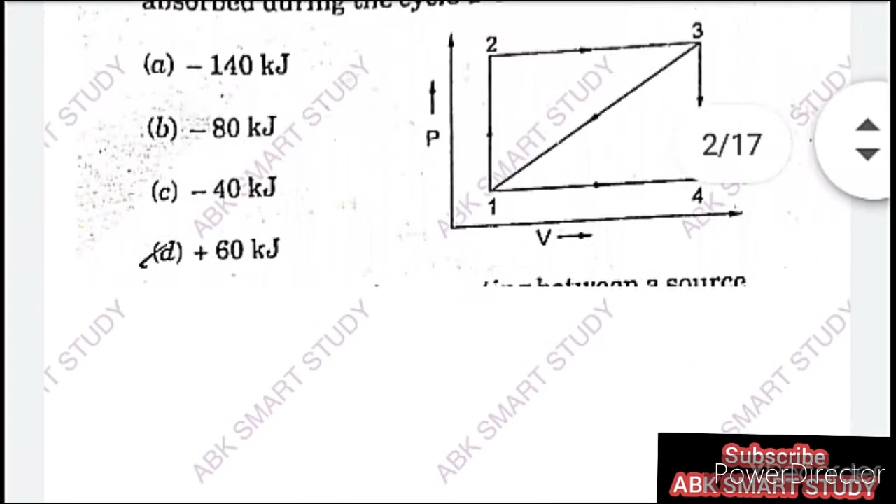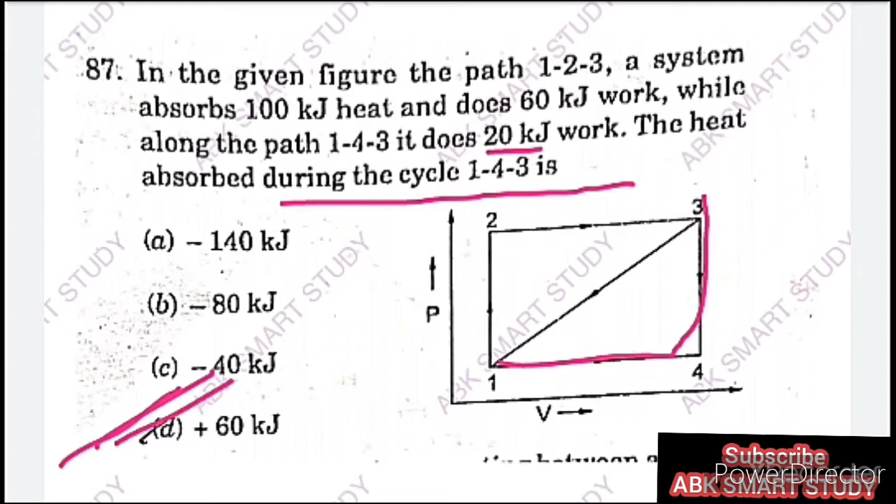So while along path 143 it does 20 kJ of work, the heat absorbed during 143 is 40 plus 20, which is equal to 60. That matches option 4, so option D is the correct answer for heat absorbed during cycle 143.

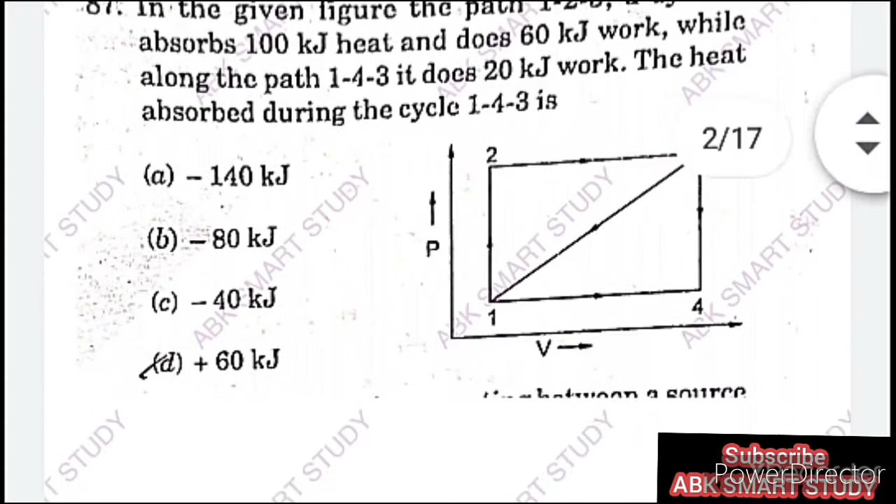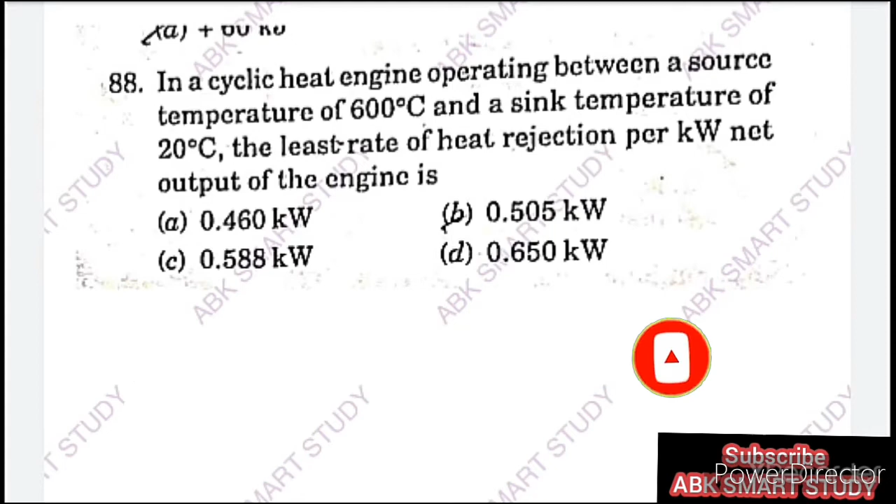Next question: In a cyclic heat engine operating between a source temperature of 600 degrees Celsius and sink temperature of 20 degrees Celsius, the least rate of heat rejection per kilowatt net output of the engine is. We know maximum efficiency is equal to T1 minus T2 upon T1. Here T1 is 600 plus 273, which is 873, and T2 is 20 plus 273, which is 293 degrees Kelvin.

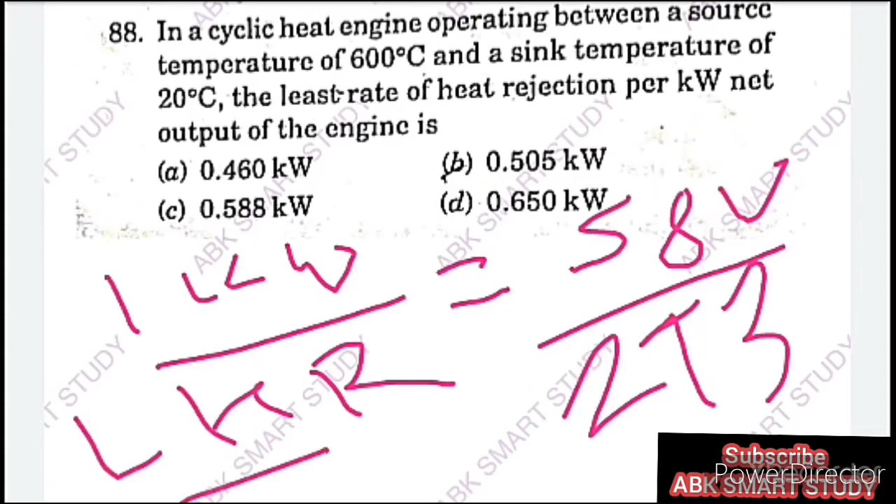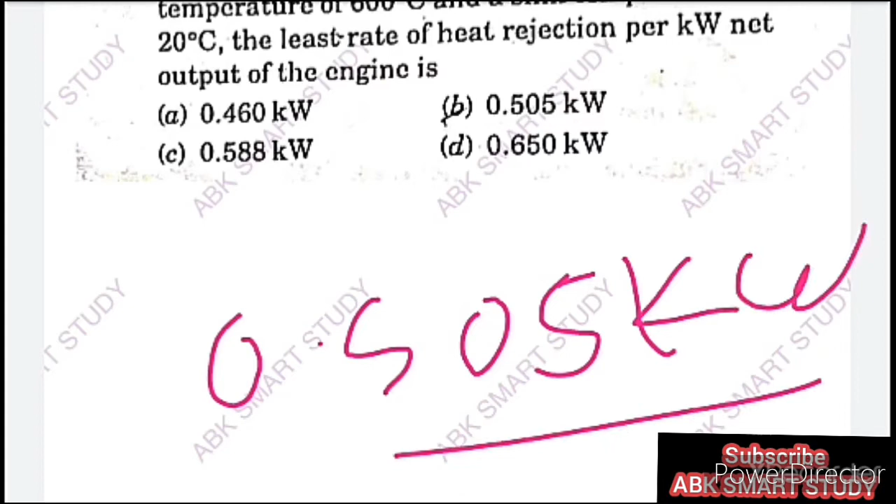By calculating that, we get least heat rejection equal to 0.505 kilowatt. So for a cyclic heat engine operating between source temperature 600 degrees Celsius and sink temperature 20 degrees Celsius, the least rate of heat rejection per kilowatt net output is 0.505 kilowatt, given in option B. So option B is the correct answer.

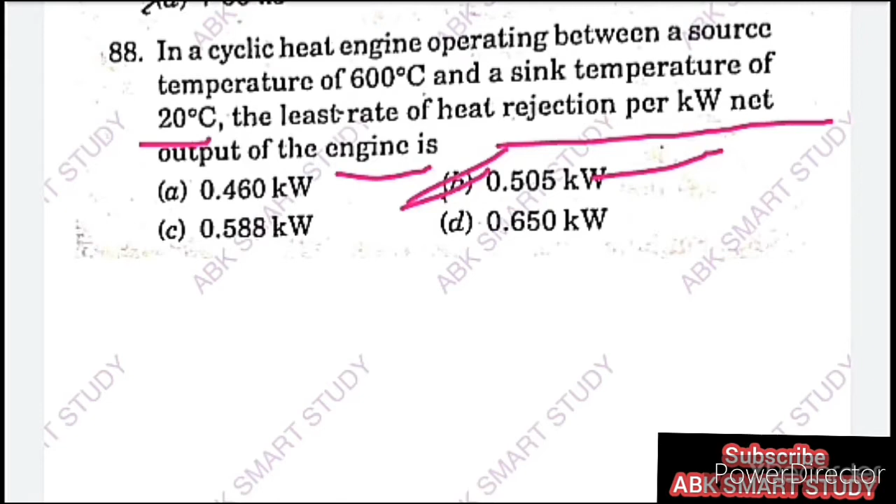Next question: A Carnot engine receiving heat at 400 degree Kelvin, so here T1 is equal to 400, has an efficiency of 25%.

Then the COP of the Carnot refrigerator working between the same temperature limits - here efficiency is given, temperature T1 is given. What is the COP of the Carnot refrigerator working between the same temperature limit? First, we know efficiency is equal to T1 minus T2 upon T1, where T1 is 400 and efficiency is 25%.

By putting that in the equation, we get T2 is equal to 300 degree Kelvin. By using the efficiency equation, we get T2 equal to 300 degree Kelvin. We know COP of Carnot refrigerator is equal to T2 divided by T1 minus T2.

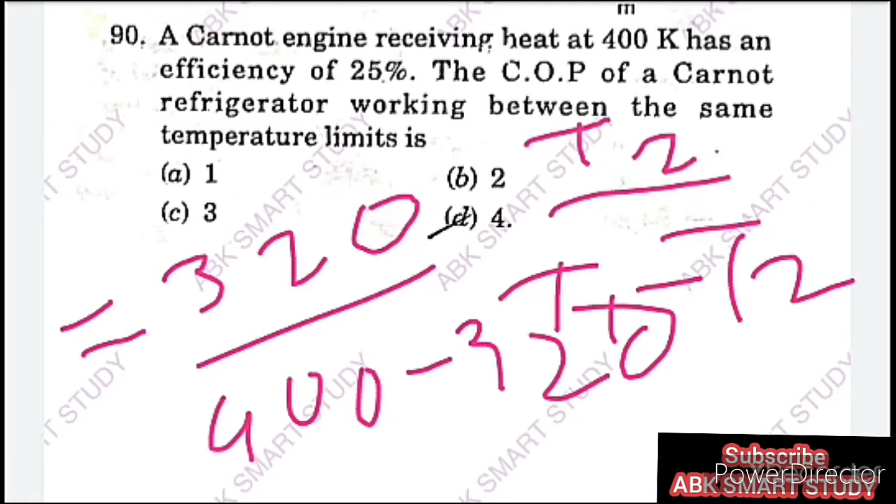Here T2 is known, so COP is equal to 320 divided by 400 minus 320. By solving this, we get COP is equal to 320 divided by 80, which gives COP equal to 4.

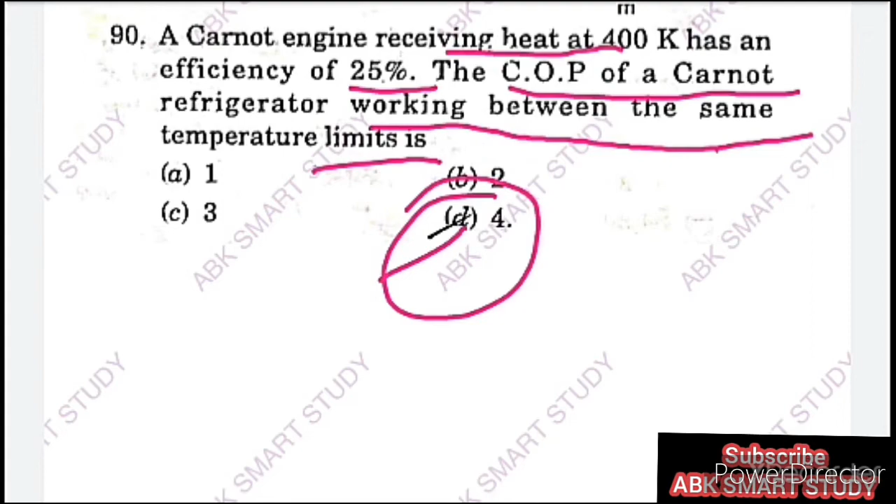So a Carnot heat engine receiving heat at 400 degree Kelvin has an efficiency of 25%. The COP of the Carnot refrigerator working between the same temperature limits is 4, given in option D. So option D is the correct answer. Next question.

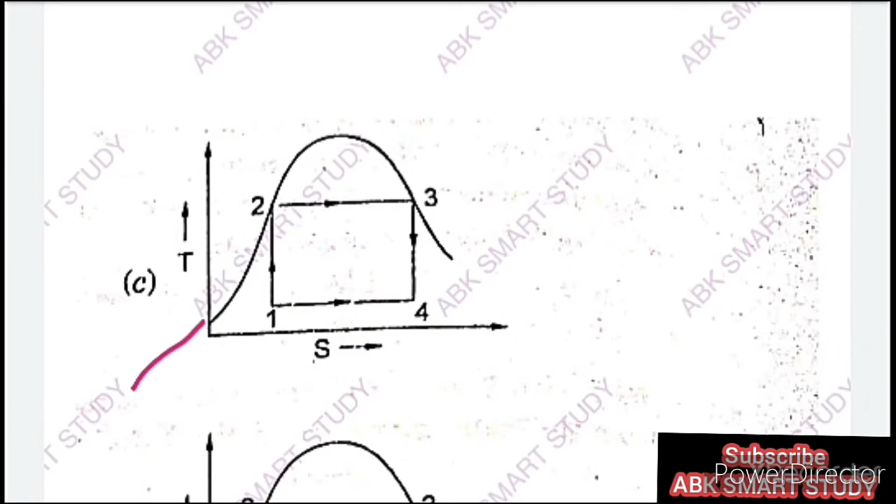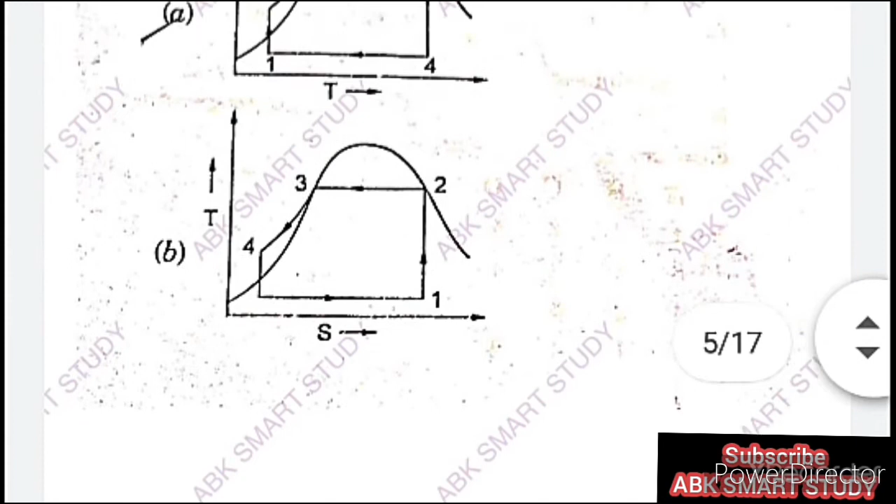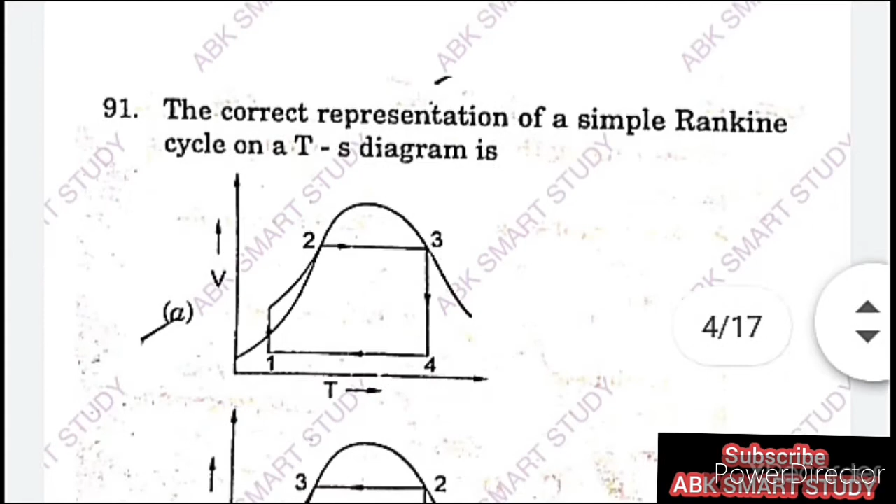For simple Rankine cycle, we know the process is reversible, and that is represented on TS diagram as shown. Options are given 1 2 3 4. The correct representation of TS diagram is shown in option A: TS diagram here 1 2 2 3 4 1, that is 4 processes given in option A. This is the correct representation of Rankine cycle, simple Rankine cycle, on TS diagram.

Option A is the correct answer for the TS diagram of Rankine cycle. That is, all processes are reversible, and these processes are ideal. So this is called Rankine cycle. Option A is the correct answer, the correct representation of simple Rankine cycle on TS diagram.

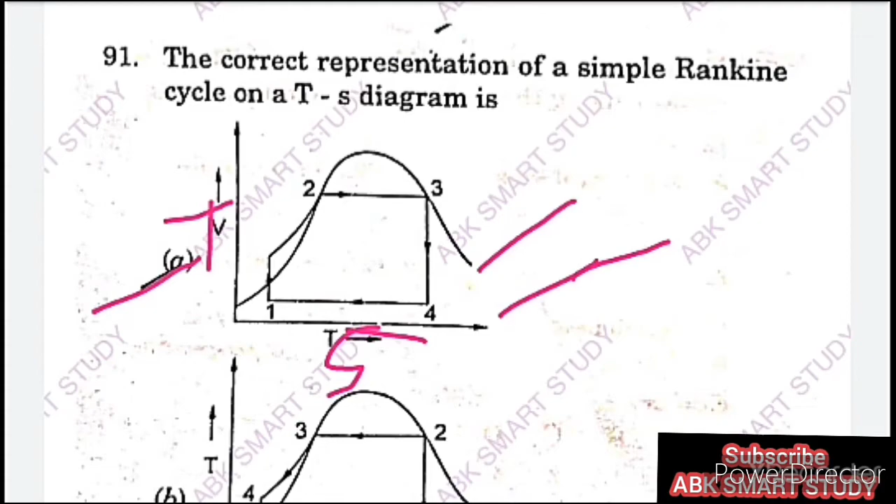Next question. The efficiency of reversible cyclic process undergoing by a substance as shown in the given diagram. The given diagram is shown here.

The efficiency of reversible cyclic process: here temperature T1 is given as 1500 Kelvin. We know efficiency of reversible cyclic process is T1 minus T2 divided by T1. So T1 is 1500 Kelvin minus 500, divided by 1500. By solving this we get efficiency equal to 0.66.

For the given TS diagram, the maximum temperature T1 is 1500 and minimum temperature T2 is 500. So efficiency equals T1 minus T2 divided by T1, that is 1500 minus 500 divided by 1500. So the efficiency equals 0.66, that is given in option C.

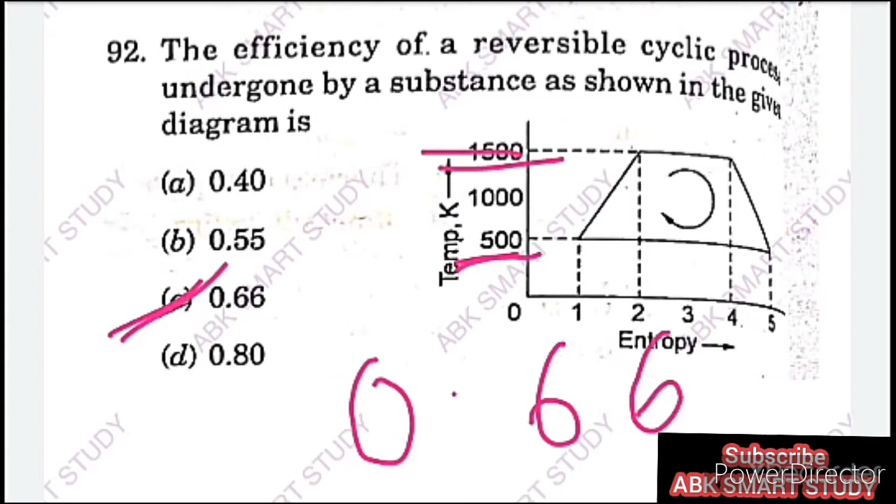Next question. The following are some intensive and extensive properties: option 1 pressure, option 2 temperature, option 3 volume, option 4 velocity, option 5 electric charge, option 6 magnetization, option 7 viscosity, and option 8 potential energy.

Which one of the following sets gives the correct combinations of intensive and extensive properties? The correct intensive properties are option 1 pressure, option 2 temperature, option 4 velocity, and option 7 viscosity - these 4 are intensive properties, independent of the mass of the system. The remaining properties - volume, electric charge, magnetization, and potential energy, that is 3, 5, 6, 8 - are the extensive properties.

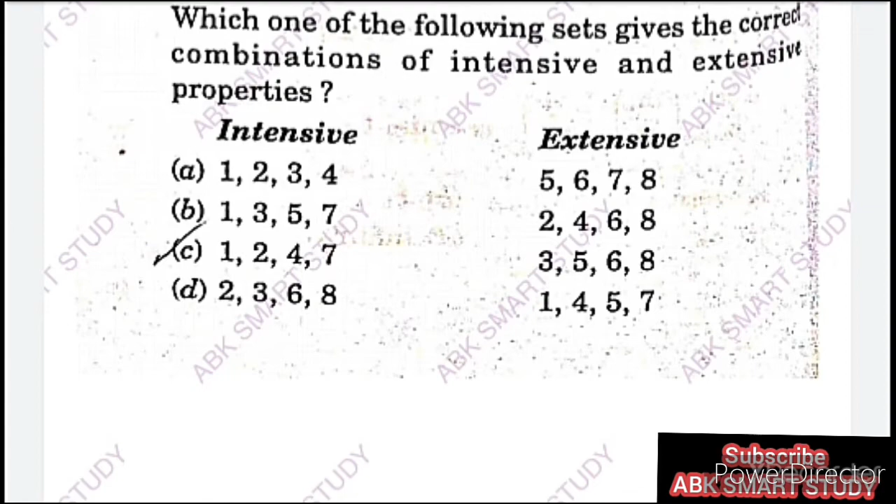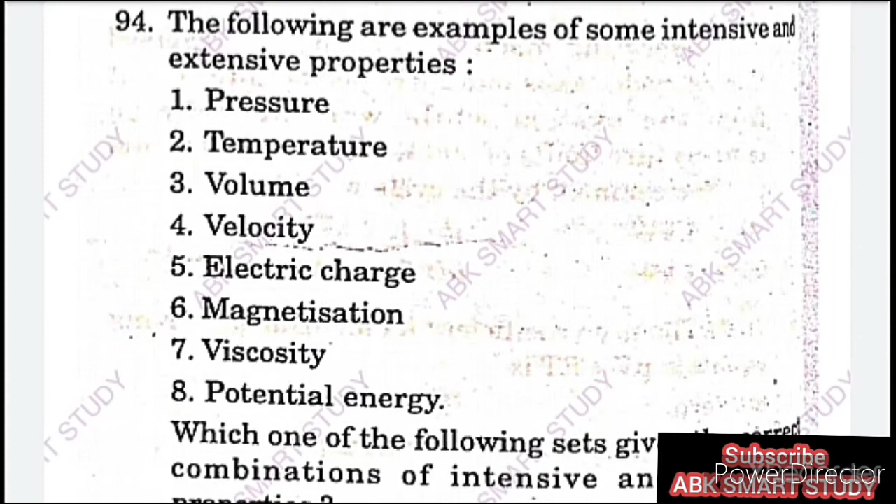The correct option is option 3, where intensive properties are 1, 2, 4, 7 and extensive properties are 3, 5, 6, 8. So for the given properties, intensive properties are pressure, temperature, velocity, and viscosity, and extensive properties are volume, magnetization, potential energy, and electric charge. Extensive properties are dependent on the mass of the system. So correct answer is option C.

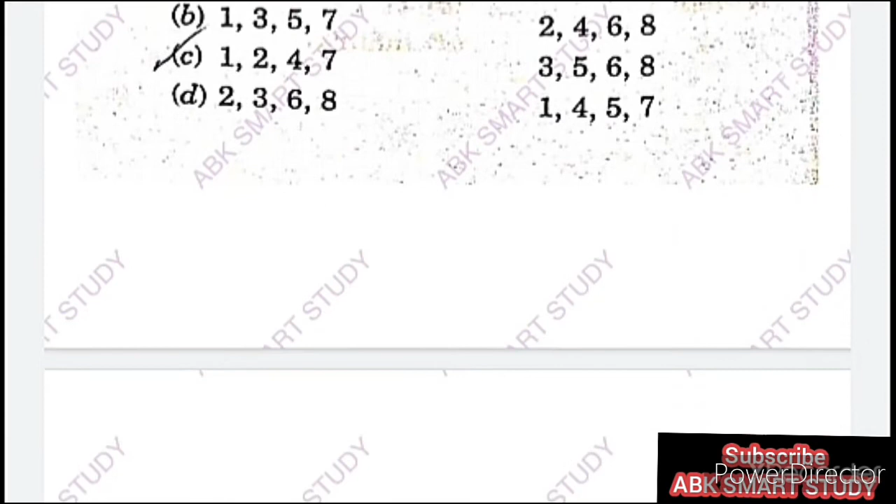Next question. If an engine gives an output of 3 kilowatt, that is W equals 3 kilowatt, when the input is 10,000 joules per second, what is the thermal efficiency of the engine?

We know thermal efficiency equals W upon Q. Here W is given as 3 kilowatt and Q is given as 10,000 joules per second. Converting kilowatt into watt, we get 3 into 10 raised to 3 watt divided by 10,000 joules per second. Solving this, we get thermal efficiency equals 30%. So correct answer is given in option B. The thermal efficiency of the engine will be 30%.

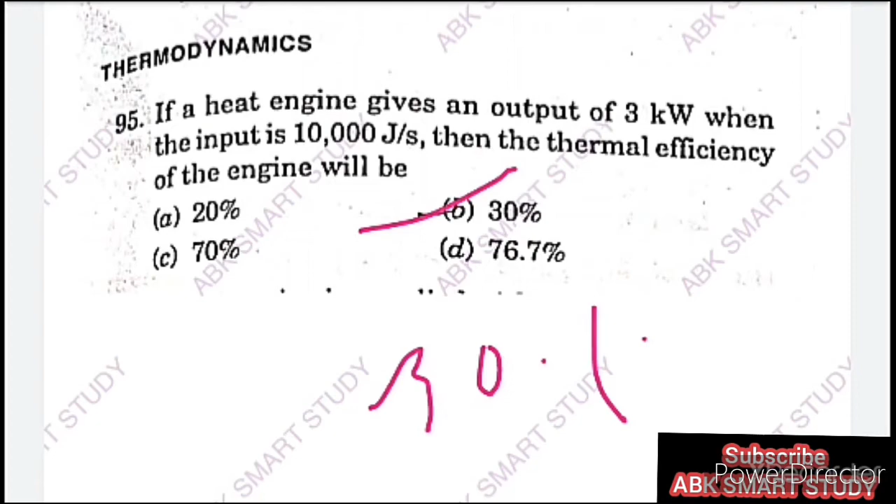A heat engine is supplied with 250 kilojoule per second of heat at a constant fixed temperature of 227 degrees Celsius. Then the heat is rejected at 27 degrees Celsius. The cycle is reversible if the amount of heat rejected is.

So amount of heat rejected is required. First we calculate the efficiency of reversible engine. We know efficiency of reversible heat engine is equal to T1 minus T2 upon T1. Here T1 is equal to 227 plus 273, equal to 500. T2 is equal to 27 plus 273, means 300, divided by T1 equal to 500. So we get efficiency equal to 0.4.

We get the efficiency. So the cycle is reversible, then the amount of heat rejected is found using efficiency equal to W upon Q. So Q is equal to W upon efficiency. Here W is equal to Q1 minus Q2.

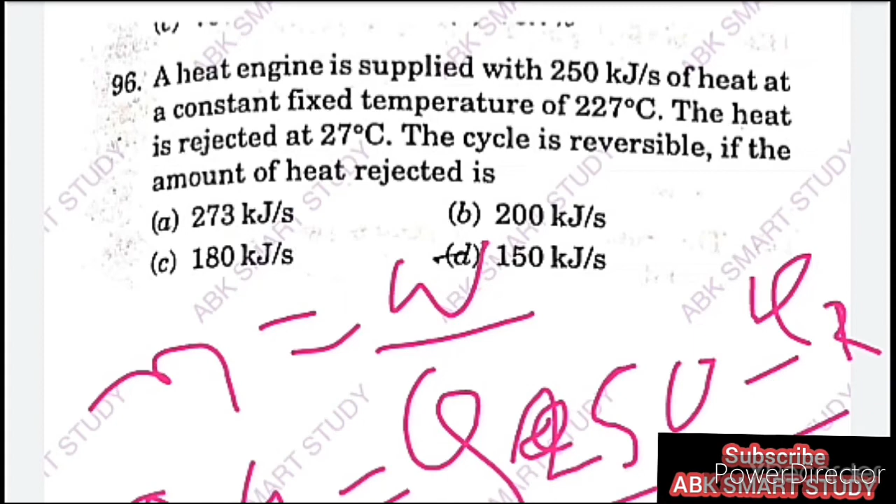We know Q1 is equal to 250 kilojoule, given. By putting that in the equation: efficiency equal to W upon Q equal to 0.4. So 0.4 is equal to Q1 minus Q2 divided by Q1, that is 250 minus QR divided by 250. By solving that, we get QR, the amount of heat rejected, equal to 150 kilojoule per second, that is Q2.

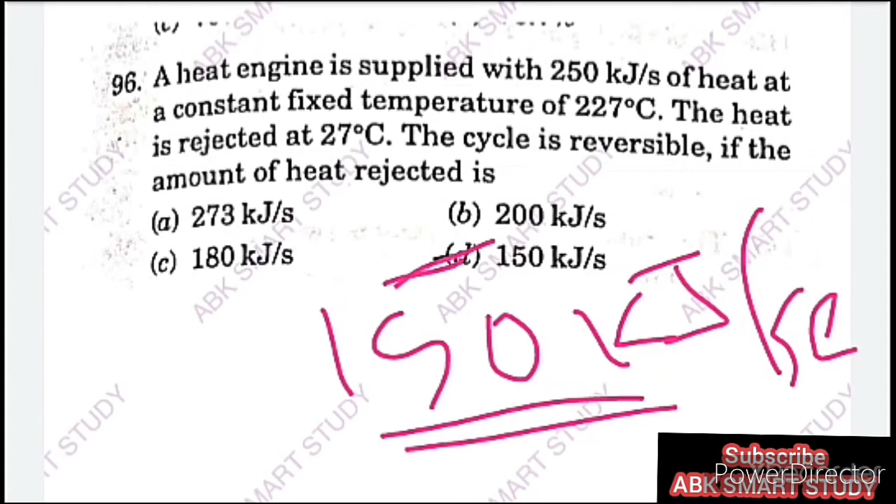150 kilojoule per second is given in option D. So option D is the correct answer: the cycle is reversible if the amount of heat rejected is 150 kilojoule per second.

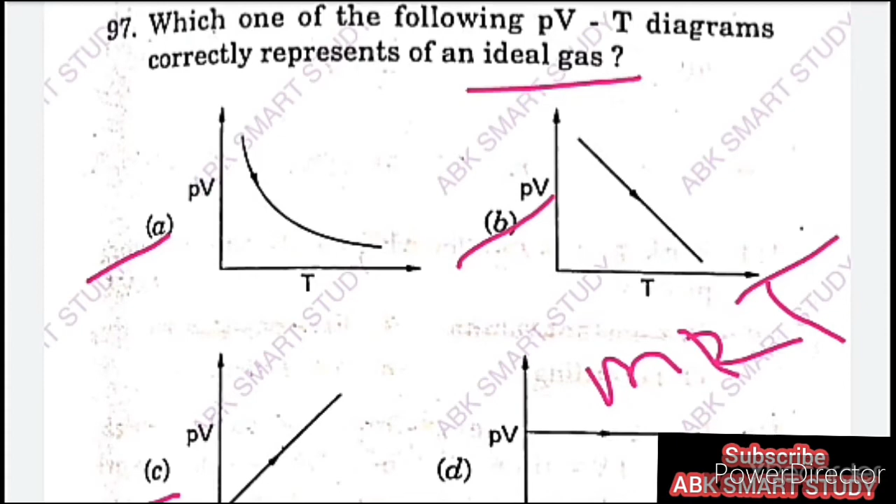We know for an ideal gas, PV is equal to mRT. So PV and T follow a direct straight line relationship. This is depicted in option C, which shows the direct straight line relationship. So the PVT diagram representing an ideal gas is given in option C. Option C is the correct answer.

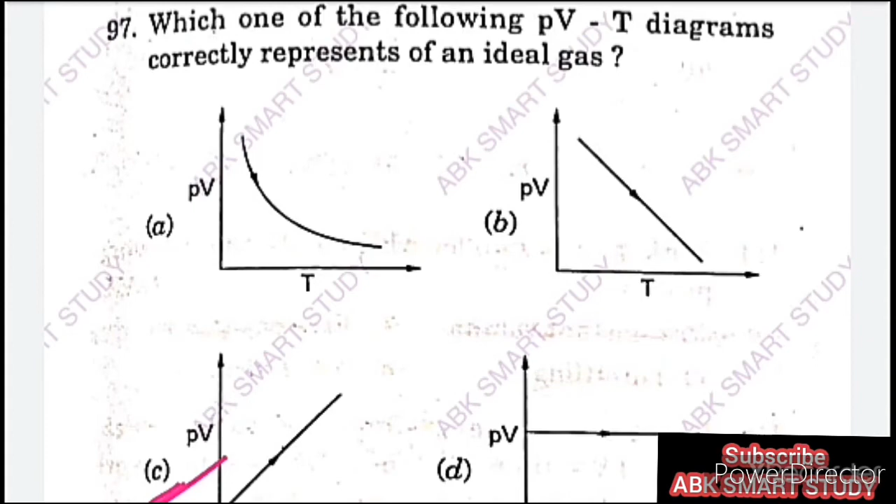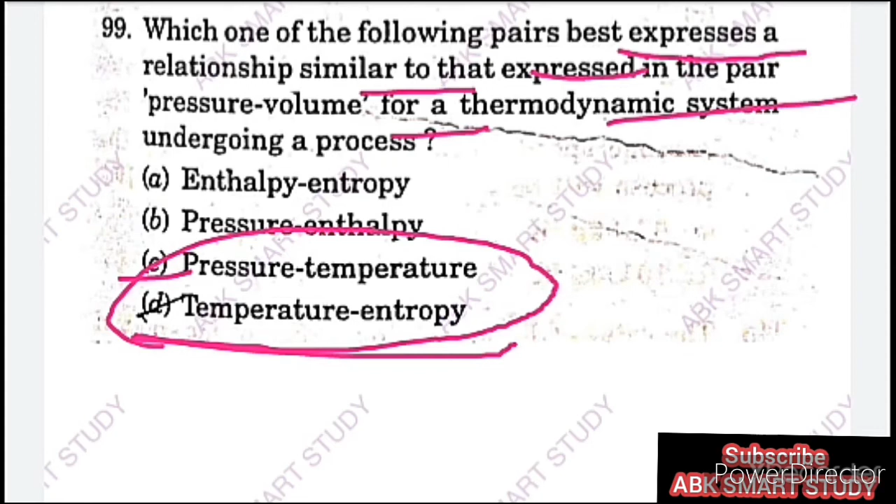We know for a PV diagram, the pair pressure-volume corresponds to temperature-entropy as the correctly matching pair. So for a thermodynamic system undergoing a process, the relationship similar to pressure-volume is temperature-entropy. Option D is the correct answer.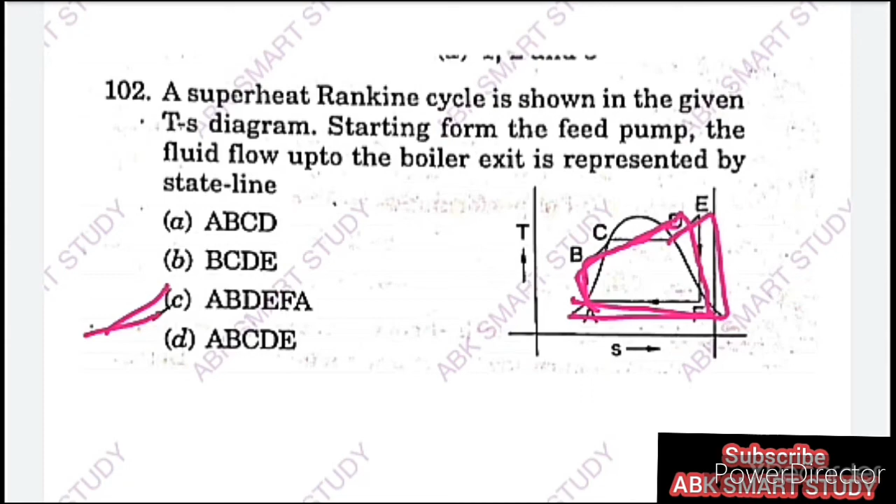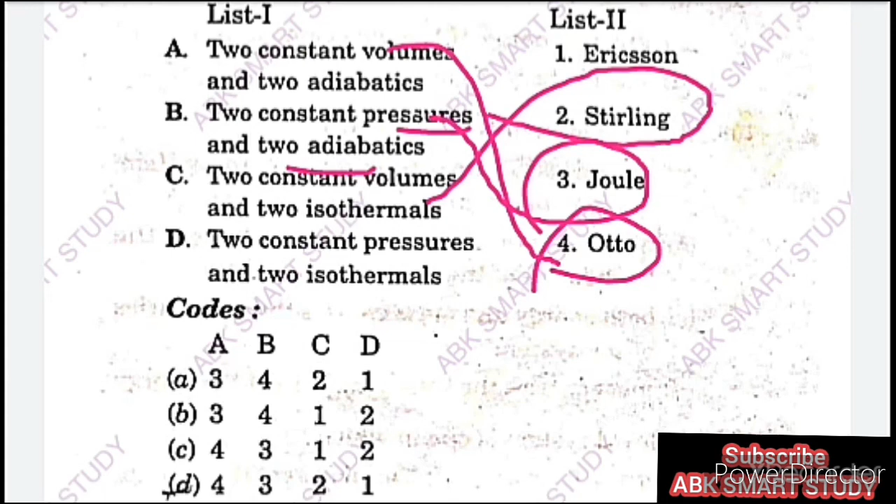2 constant volume and 2 isothermal processes are given in the Stirling engine — so for option C, that's 2 constant volume and 2 isothermal processes in the Stirling cycle. And option D: 2 constant pressure and 2 isothermals in the Ericsson cycle. The Ericsson cycle contains 2 constant pressure and 2 isothermals, while the Stirling cycle contains 2 constant volume and 2 isothermals.

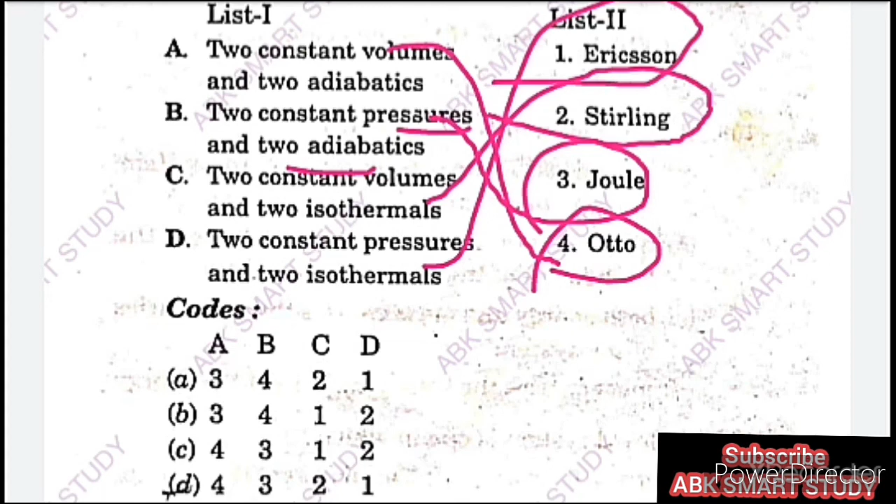So the matching order is 4 3 2 1, which is given in option D. Option D is the correct answer for the above pairs matching: 4 3 2 1.

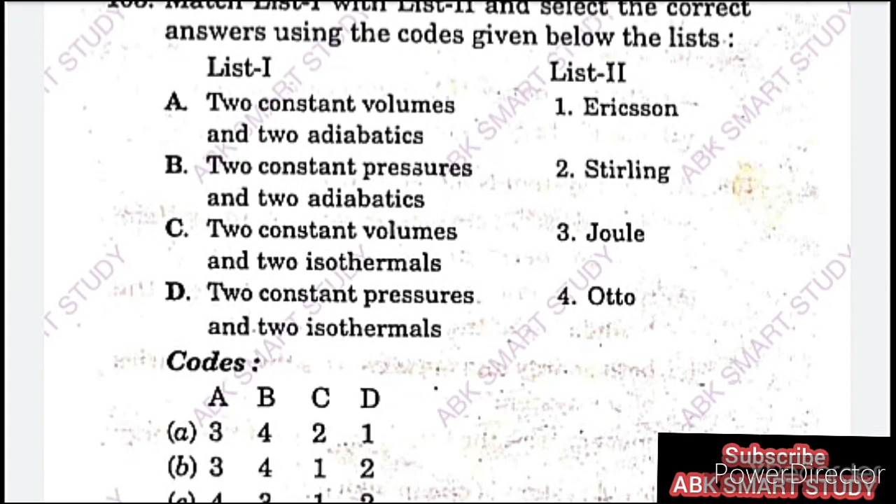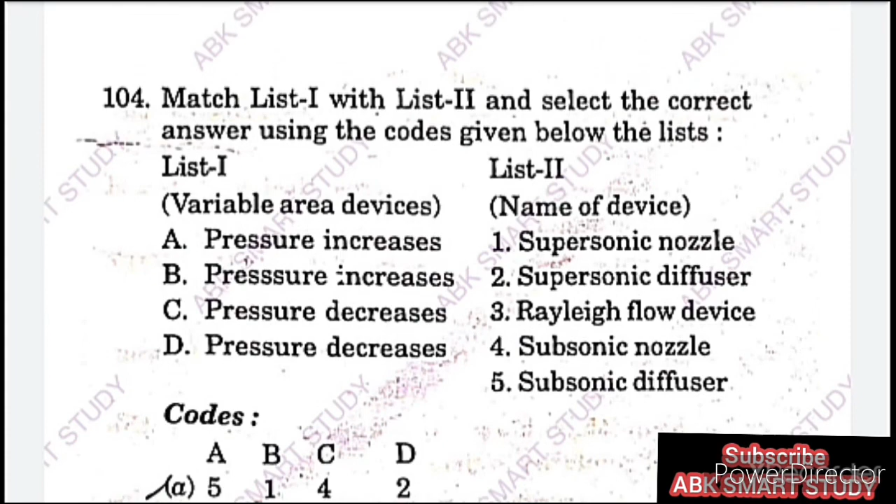So this is the important question for today's lecture.